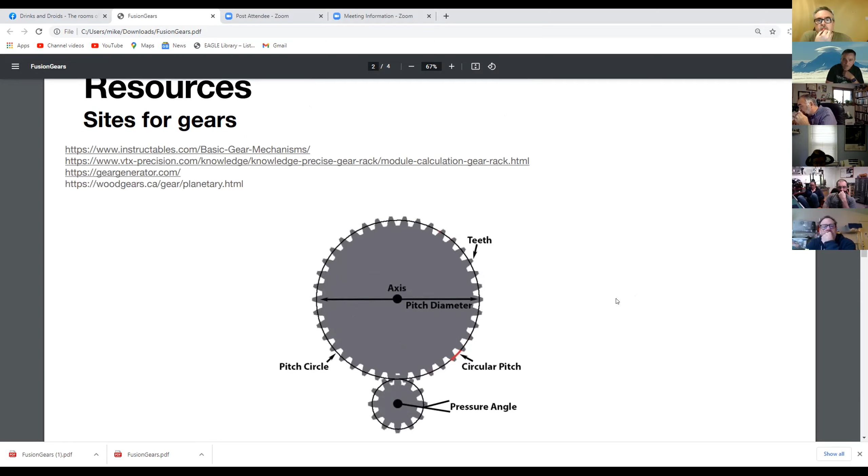Right, so in the perfect world we take half of the pitch circle of each one, the radius circle, and like today's example that number is 58 millimeters, but you probably want it 58.5 or 58.25 millimeters. Otherwise, just due to the imperfections of reality, it's going to be too tight and bind.

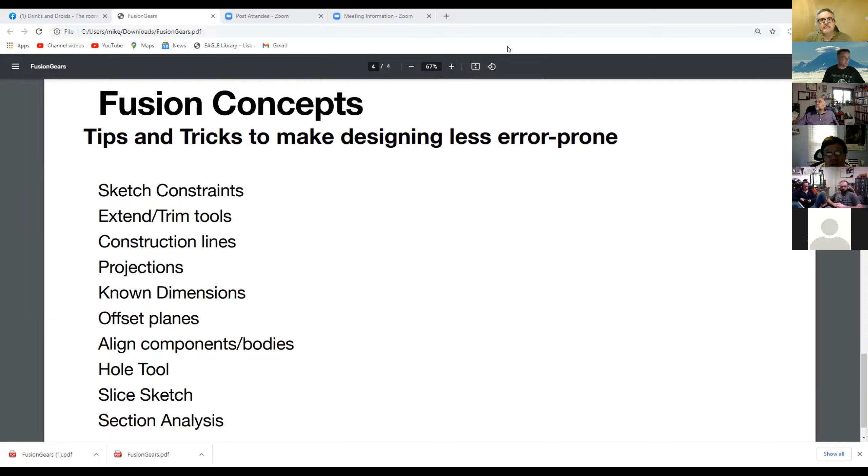So those are my buzzwords to listen for as we go into the Fusion stuff. And that's the end of my prepared remarks.

Brilliant, thanks Tim. I'm interested to watch this because I do direct modeling—I tend to use sketches only to create solid objects, and then I cut solid objects up.

So I use it in a very different way than you do. But I think it's worth seeing every facet, because as you get more comfortable with Fusion, you tend to develop your own persona of how you actually use it, because you can use Fusion in lots and lots of different ways.

Cool. Yeah, I have been toying with the timeline. I did a recent project where I vowed to use the timeline the whole time, and the only way to do that is to manage it with components. And so in the same breath, I at the end of it abandoned the timeline. It just gets too complicated.

Yeah, that's good to hear. I thought you may say, 'Oh yeah, it was great, it all worked for me,' because I've tried the timeline a few times, and I've just wrestled with it and thought, no, it's more trouble than it's worth. Well, the duo model I did is 100% with a timeline, but it's also got components. The cool part is when you click on a component and edit just that component, it has its own timeline, and that really boils down the complexity.

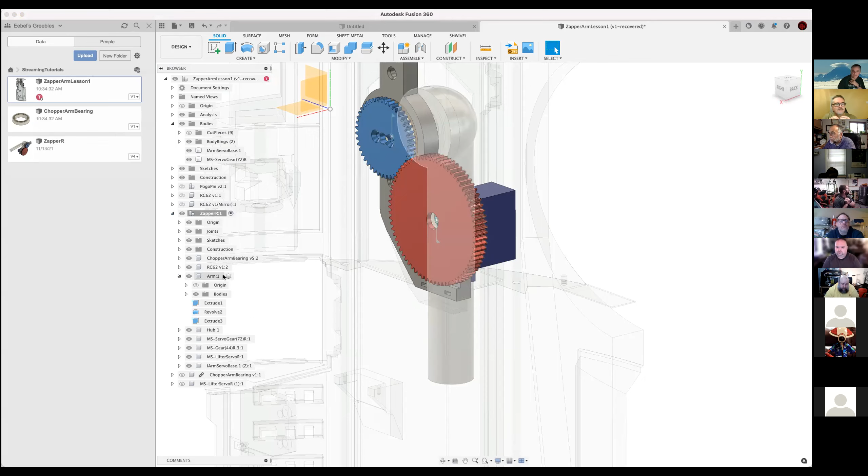Everything else in the project goes to this glassy mirror gray stuff, and then my project becomes active. And the important thing is every edit, every cut, copy, paste, sketch, plane, everything is now going into this component.

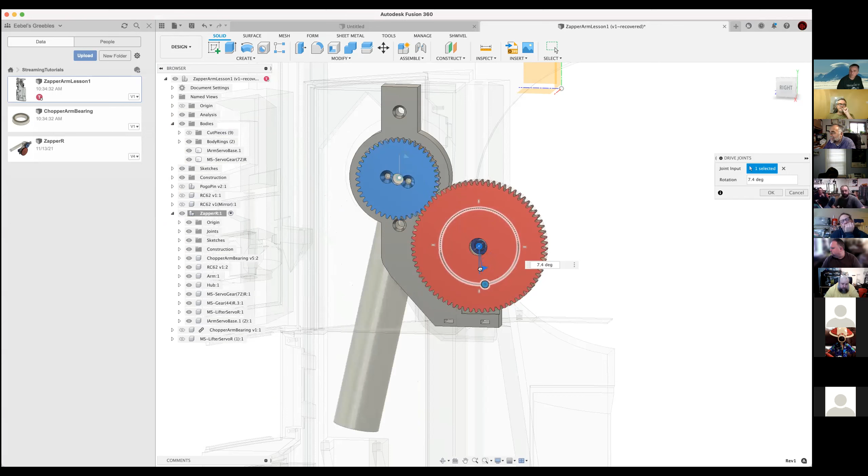You can see it's a complete set of everything a project would have inside this one component. And if you look at my component here, it's got components. The reason I do that is if I want to do any animations, they have to be components. So if I click on this and hit drive joints, you can see I've got this animation. It's not an animation, it's just a physical relationship, so I can see range of motion and conflicts it might run into.

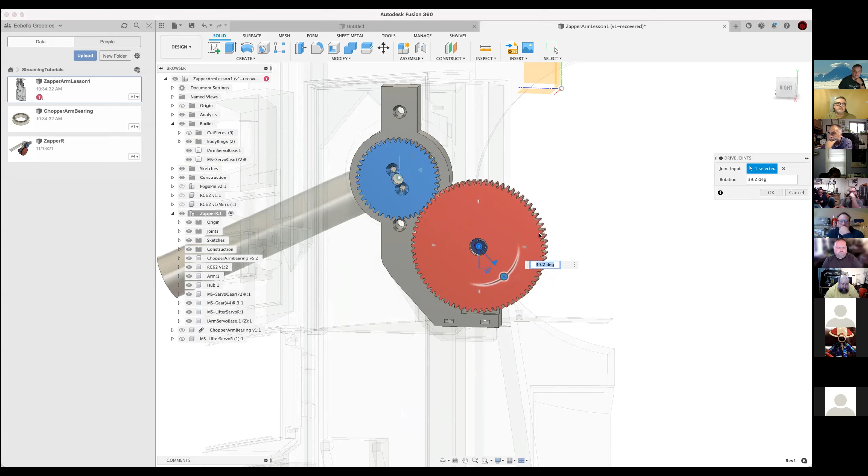Most importantly, in my gear design I wanted my servo to move less than 90 degrees and my arm to move more than 90 degrees. The easiest way to do that is to have more teeth on my drive gear than on my driven gear. So in my design, my servo moves 60 degrees and my arm will move about 95 to 100 degrees.

The reason I chose to do that is when you're tuning servos, if you're at exactly the limit of the servo, you're going to run into troubles, because that servo may or may not deliver a full 90 degrees.

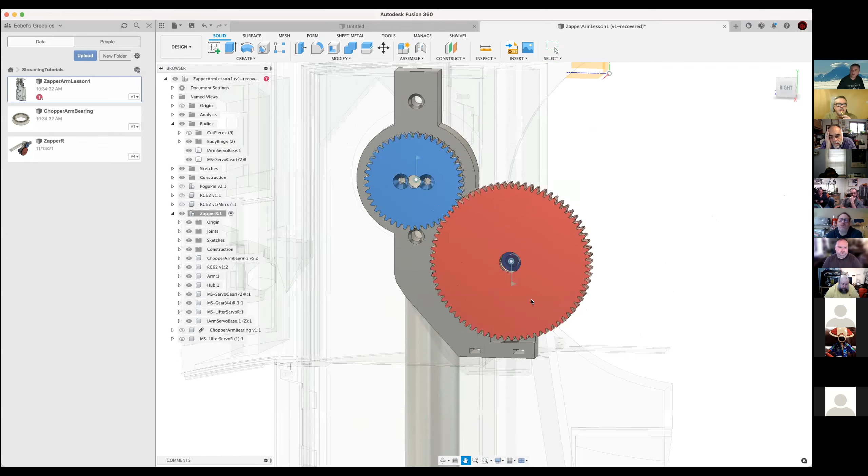Hello? I can't see anybody else's. That's okay, carry on. Okay, there's a bit of background noise.

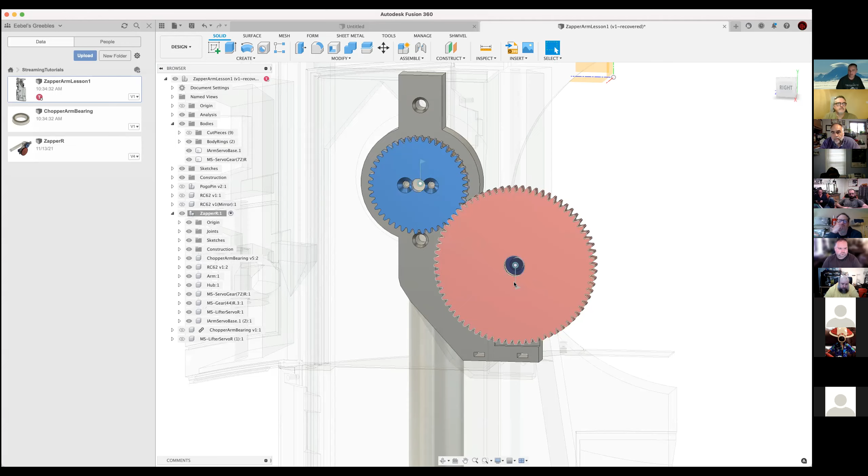If I can have my servo run less than its full capabilities, then I have an opportunity to tweak that servo when I'm installing it and programming it. So I'm not going to run against any hard limits, meaning I need it to run 92 degrees to get the motion I want. If I design it to never need the full 90 or full 180, then it's much easier to tune that servo, install it, and have it work for me in a snappy fashion.

So that's kind of a sneak peek of where I want to go with this project.

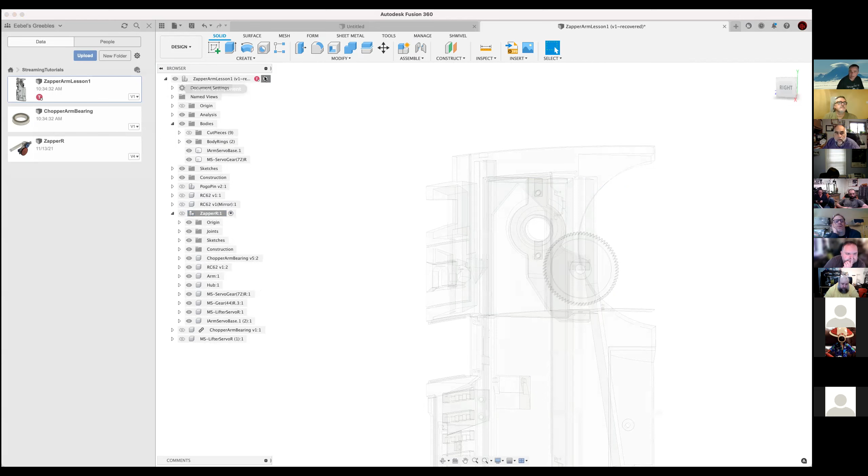Other things of note, I've got choppers. Let me activate, this is important — I'm going back to reactivate the main project. So this completed Zapper is still there, I just turned it off, but nothing's going to be changing on that component. And if you look at this component here, chopper arm bearing, see this little link, this little chain link? That means this component is immutable — it cannot be changed by me by accident because it's bound to the chopper arm bearing.

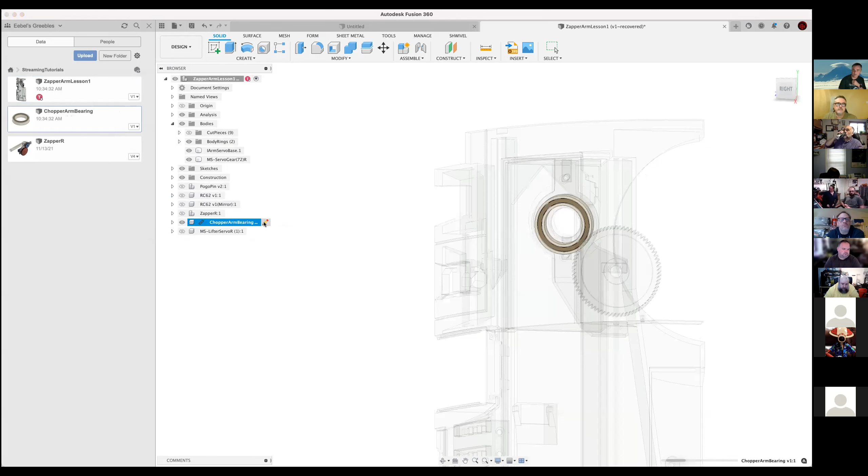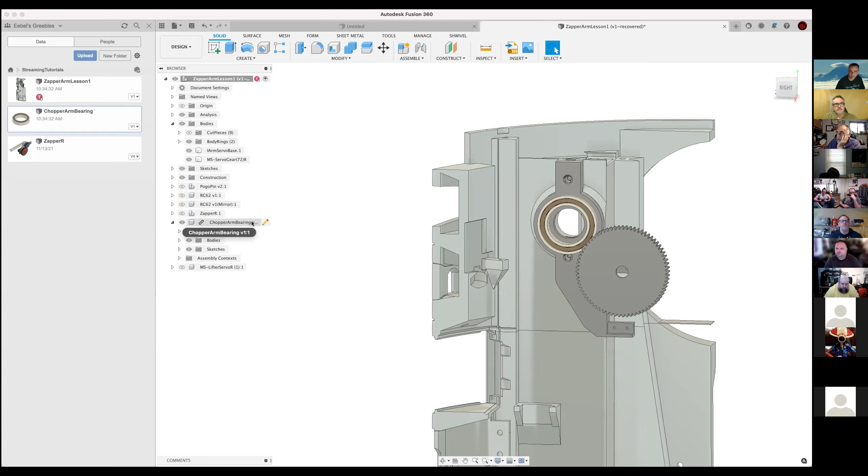That doesn't mean I can't change it. I can change it one of two ways: one, I can open the chopper arm bearing as a separate project, or two, if I go to this little pencil, I can edit it in place, sort of like editing in a sketch. I can do whatever changes I need, but I have to come here to this check mark and end that. That's an important safety tip — if you don't do that, you're going to get confused as to why your edits aren't working, why did Fusion crash on me? Well, it didn't, you just have to play along with its rules.

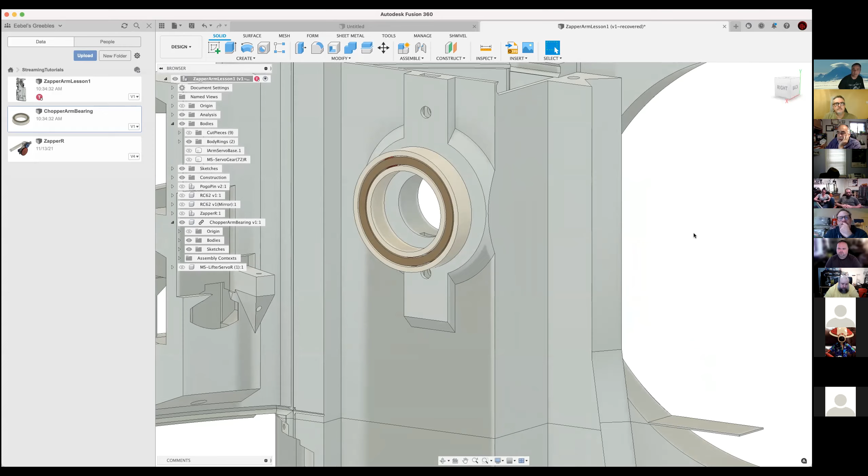So this chopper arm bearing is something I thought would be neat to integrate into this servo lifter, because that's going to give it more stability, so it's not going to rock back and forth, and it's going to be less load on the servo because it's going to have a nice bearing tracking a path.

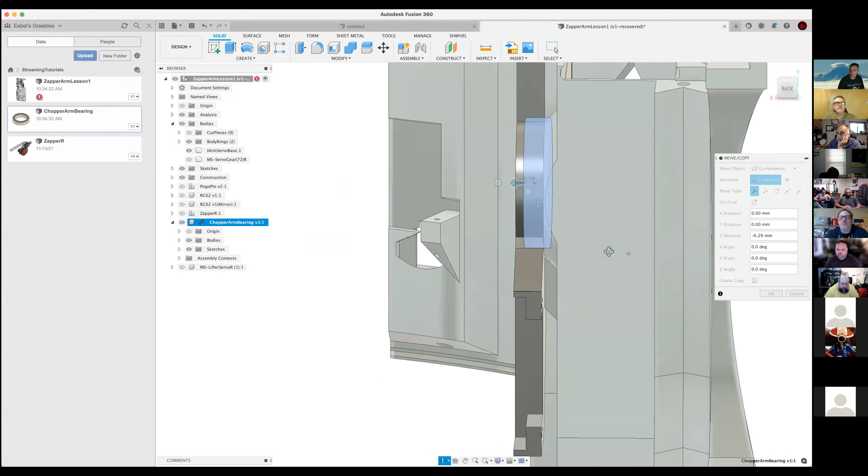The biggest reason I thought it'd be cool is, if I go move here — let me just play here for a sec, not that, I want components, and I'm going to pick chopper arm — if you look at it, it fits inside of the existing mount. So I thought, oh, it's purpose built to pop right in there. As a happy accident, the chopper arm bearing, I can reuse as a basis for this upgraded arm lifter. So I just hit escape.

We'll get back to that as the lesson progresses.

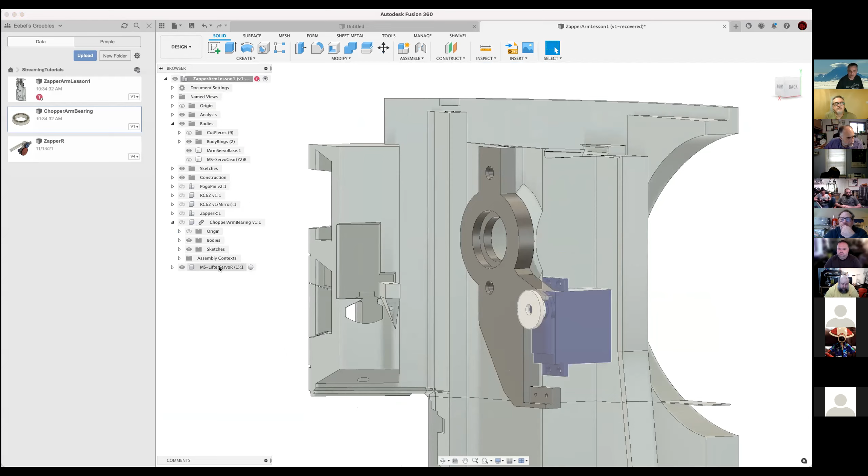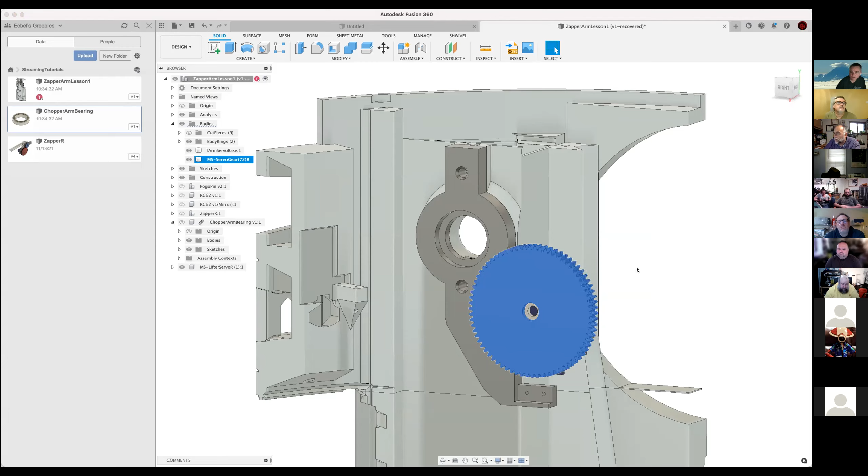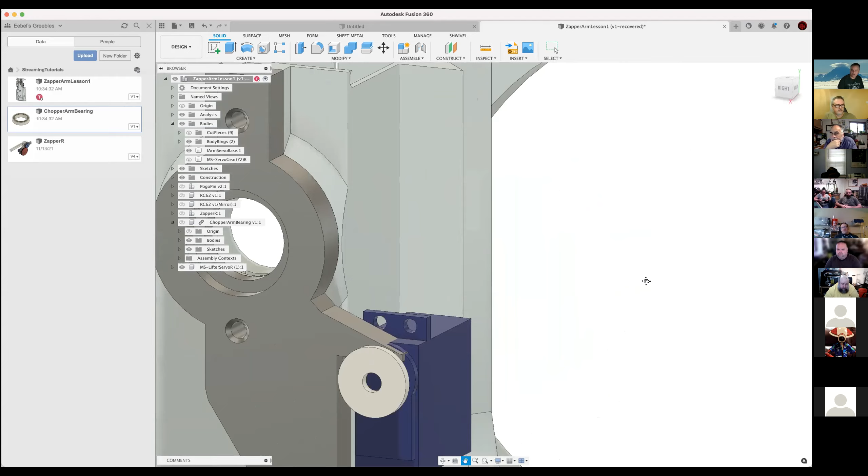So what I did was cut and pasted, or built a new component for this servo lifter, from Chopper's design. The reason I did that is, again, it's a shortcut — Chopper used this exact same 72 and 44 teethed gear, and since I'd already gone through the pain and trouble of working out that geometry and test printing, and finding that servos would work, I just started that as a baseline for doing the model on the Mark III. So the reason it's sitting here in midair, kind of smashed into the lifter, is because that's exactly where it needs to be to make my gear geometry work with the rest of the model.

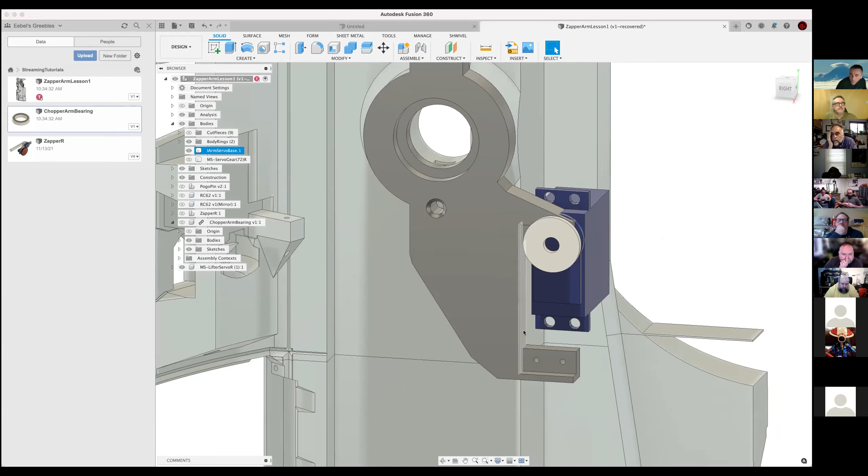So basically, I'm using shortcuts of stuff I know works, and I'll bring it into a project, often as a component. When I'm working on that component, I tend to activate it to make sure all the edits fall inside it, particularly if I'm doing motion studies. It's very complicated — if you're not careful, you'll end up with some joints in the wrong component, and things can get confusing.

So probably step one is to split up this joint. Is everybody familiar with the split body command? All right, so I'm just going to pick the face and hit split. I always keep track of what extra pieces show up when I split stuff — if I get things I'm not expecting, I know I've made a mistake. This makes sense: I've got these two extra pieces, and that was my intent, to get rid of those.

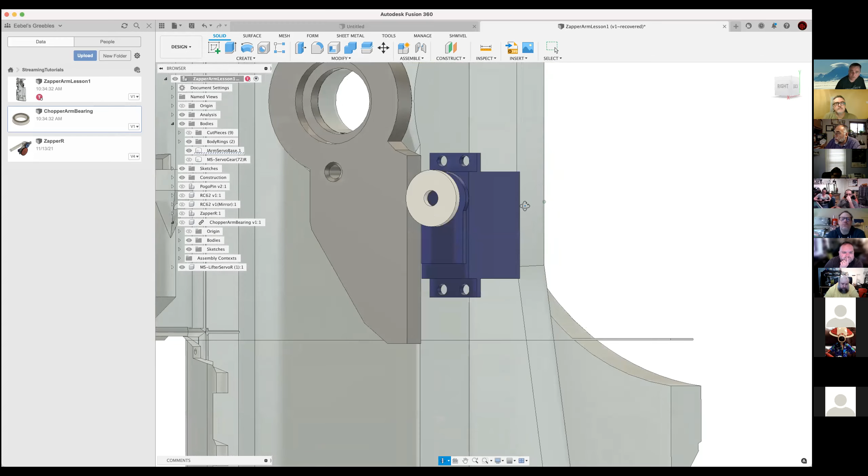So at this point, I'm just going to go hog wild and delete them. I don't need them, I'm going to build new ones. So to build a new mount, the first thing I probably want to do is create a sketch, and I'm going to do it this way.

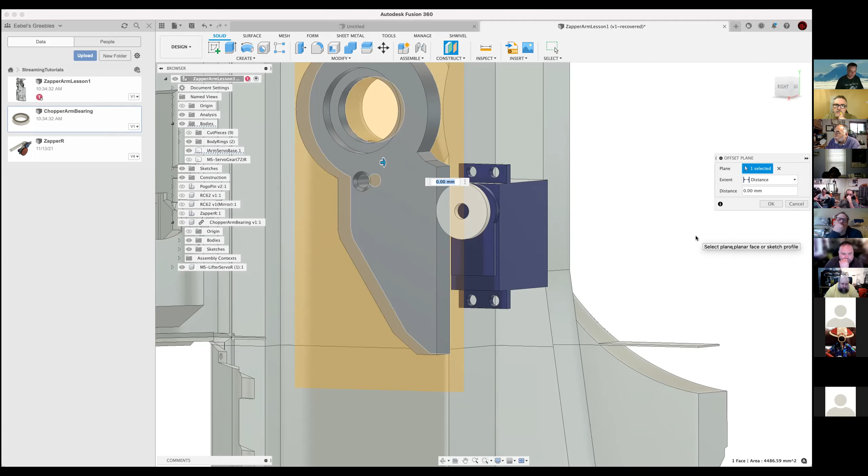I'm going to do an offset plane, and create it on the back of this mount, because thinking about printability, I want this to lay flat on the bed, and the back of it's going to be on the bed in my design. If I do anything that changes the flatness of that, I'll try to avoid it. So here's my offset plane, and I'm going to hit OK.

Here's a fun thing I learned recently — you can stretch this plane around by just floating your cursor, see how the line turns green? It's not necessary, the plane's a plane, it goes forever, but it's kind of nice not to have a big chunk of messiness all over your screen because it tends to obscure your vision.

So Tim, why do you draw on an offset at 0 as opposed to actually drawing on the plate?

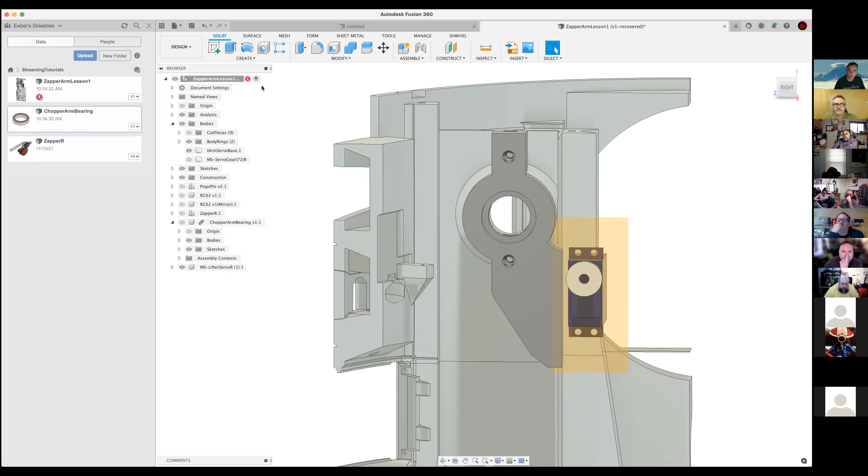Well, the reason I don't always do that — if I just grab that and drew a sketch, it's going to import all this extra geometry that I'm frankly not interested in, and it can get me confused with extra lines and dots. It's just more clutter.

So I'm going to create a sketch on this brand new plane. I hit it when it does that. The only geometry I'm interested in from that whole piece is this, so I'm going to hit that, project with the P key, and hit OK. Now this is the only bit of geometry from the previous model I have to be concerned with.

This is really an important point — when you draw on the actual face of the model, it knows where all the edges and circles are, and it will attempt to snap to those. When you draw what you think is a continuous perimeter, it can sometimes segment that through the existing design. So by doing the offset plane at 0, it's effectively like starting a new sketch in a notepad, isn't it? It is.

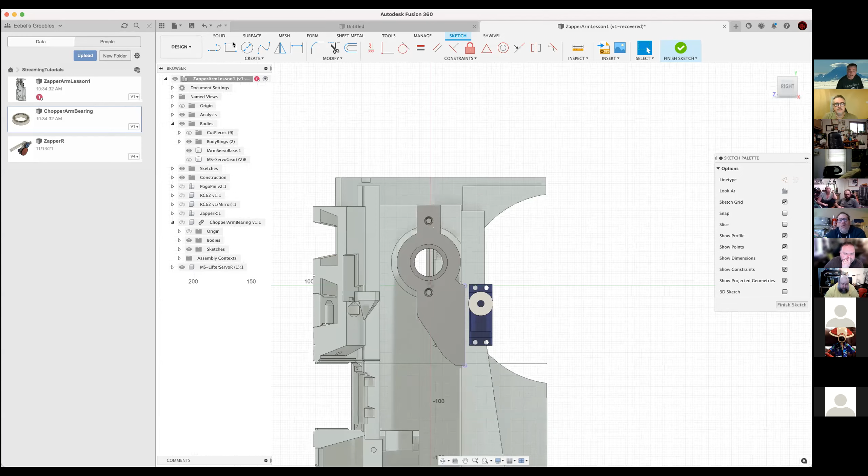And the feature where it automatically projects the geometry onto your sketch — that's an option. I've been afraid to turn it off because it's so entirely useful most of the time. But sometimes, particularly when modding, you don't want that extra distraction geometry or confusion it can generate. So the first thing I'm probably going to do is just randomly change the shape of this. And I already don't like how this is working.

So grabbing this 2-edge triangle thing, you can see here's the error already - this is not lined up with that, and I don't like that. So I'm going to undo that, and I'm just going to take out my line tool and be a little bit more precise with it.

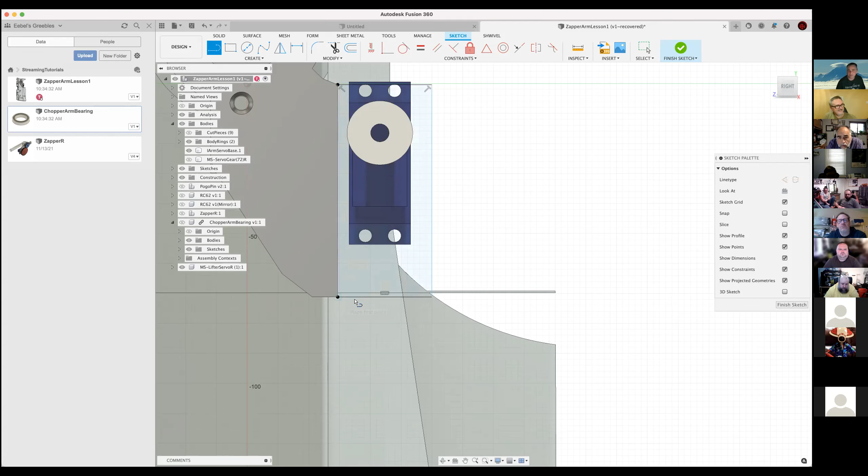Everyone knows how you can constrain by selecting something. Right now look, I got 90.6 - it's not really 90. I always make sure I'm getting 90 degrees out of things, or known angles out of things. And here's one thing I will also do.

Now that I've got that, I'm going to select this line and hit X, and you notice how it turns to a dotted line. So now that's just a construction line - we talked about that in the preamble - and I'm just going to close this off and put my own line in.

So although I started the other thing as a projection, I've kind of divorced myself of that other geometry. So if I need to change something, I'm not entirely locked in there forever - it's just a little bit less confusing to me when I divorce the geometry from those projected things, because that can really get you into a lot of frustration. You're like, why can't I change this? Why is this not working?

It's because of these constraints. So in this picture, you can see this line is black, that line is black, this line is blue. That means this is not constrained, which in this model is probably fine, but I'll just eyeball it and put it there for now. And you can see this line is black - that's constrained. So I've got one unconstrained line.

If I were to, I don't know, put a dimension here with the D key, that's over-constraining it. Maybe here - does that not go black? The constraints can be a little bit of an art form.

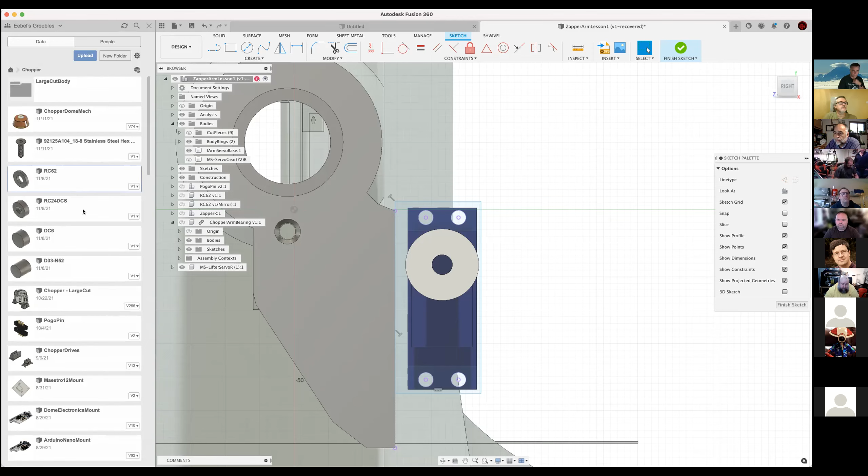Another place to get things - and my screen's still sharing, so let's go back here to, for example, Chopper. If you look at Chopper, a lot of websites will have step files that you can import directly. So this RC62 - these are all magnets that I downloaded, the step models from KJ Magnetics. This pogo pin I modeled, but if you go to GrabCAD, they have things like this - or maybe I got this from Pololu. This will take a second to open, but they had a model of their board in CAD.

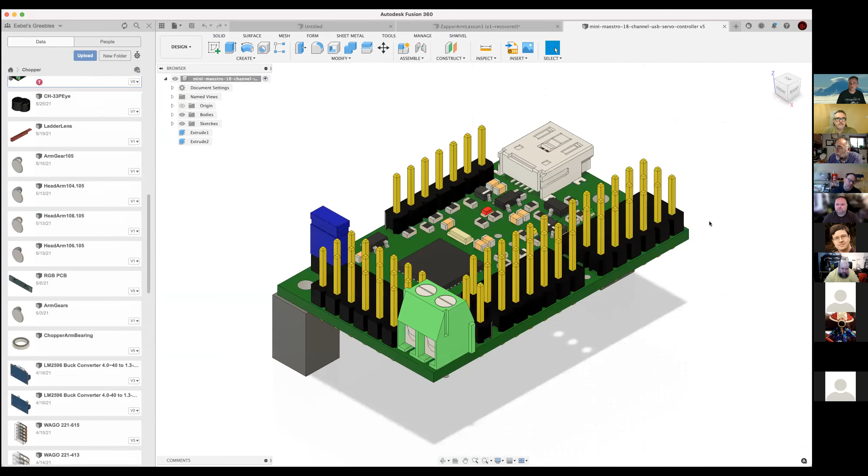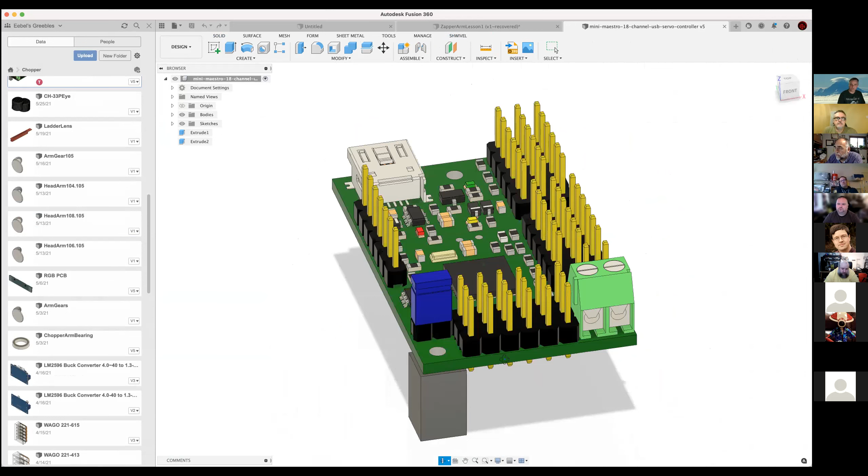So grabcad.com is a place I'll go to for things like buck converters or whatnot. In this model, you can see what I did. This is a Pololu product, but I added the geometry for the little mounting pads.

I added that to my version of this component. For example, I'm going to close this sketch on this sidebar. If I wanted to import that in here, I can just right-click, insert into current design, and after a few seconds of thinking, it'll let me place it into this model.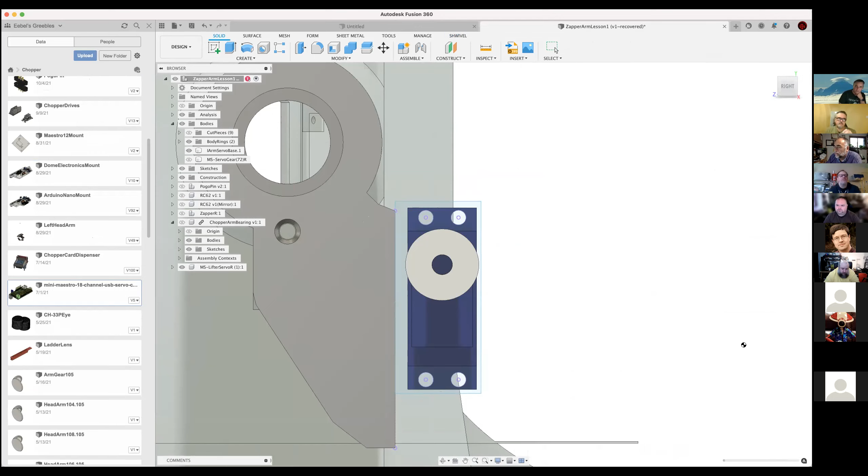You can see my little progress bar. It's going to take a second to download off the internet. Here it comes. All right, you can see the important things. I got this Mini Maestro 18 channel.

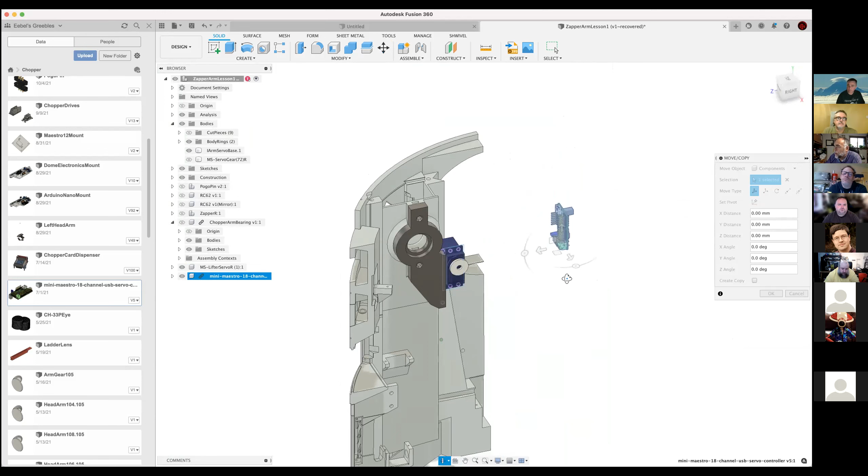I've got it chained, meaning this model is not editable without a couple of hoops to step through. Then I can place it anywhere, and usually I just do a raw place. I'm careful to always spin things 90 degrees so I don't end up with some kind of weird twist to the model.

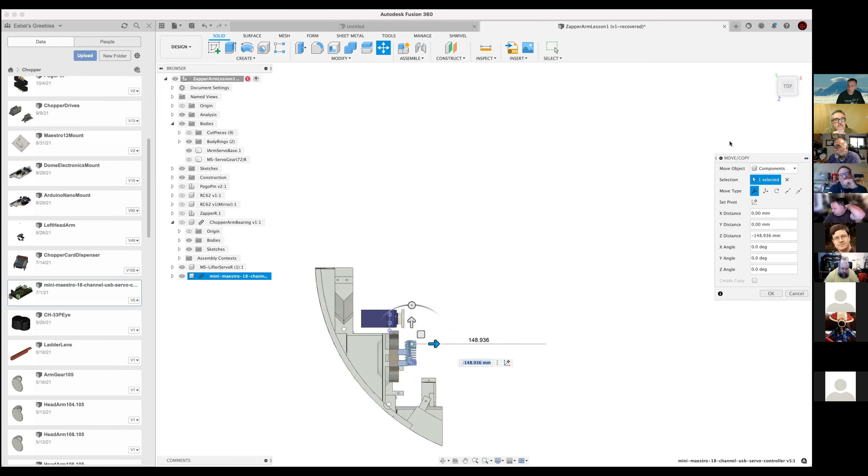But if I wanted to integrate this Maestro onto this mount for some reason, you can see there we have it. And then I could combine pieces, and I think that answers the question.

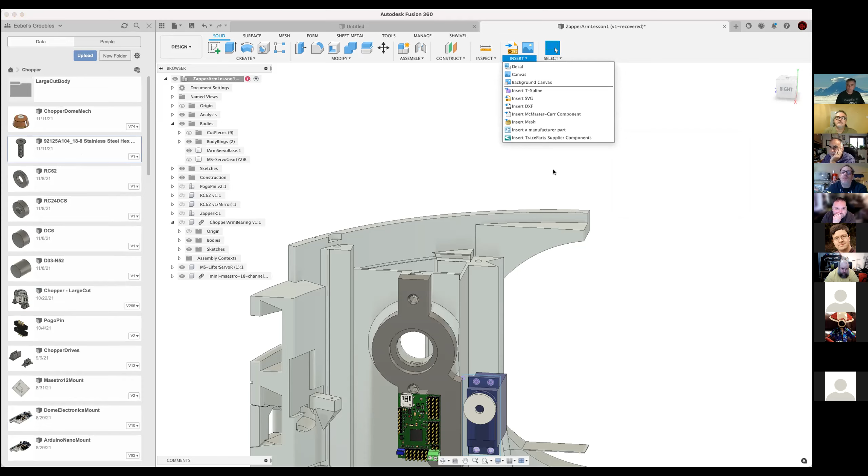Another good source: if you go up to the top, you go to Insert, and you can insert McMaster-Carr parts directly. They used to be McMaster-Carr, and just recently it's now TraceParts, which I clicked on the other day and was a little upset because you might have to make an account. I'm sure you don't have to spend any money, but like this bolt here, I actually went to the website, exported it, and then imported it because it was no longer an easy insert from McMaster-Carr.

Oh, there it is, never mind, take all that back, I just missed it. It used to be at the bottom, and now it's not. Yes, I use this a lot—you get all your hardware and such, it's good for inserting screws and such.

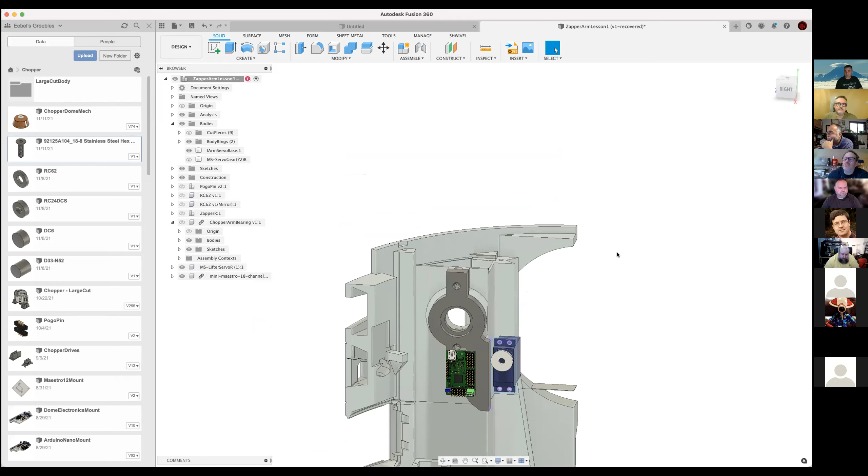Exactly, and I don't normally model screws or put screws in unless I'm trying to show an explicit assembly, like in the instructions. Or theoretically you could do a hardware bill of materials if you modeled all your screws and put them in, but it adds a lot of extra computational requirements on your models. So the less things in your model, the better in general.

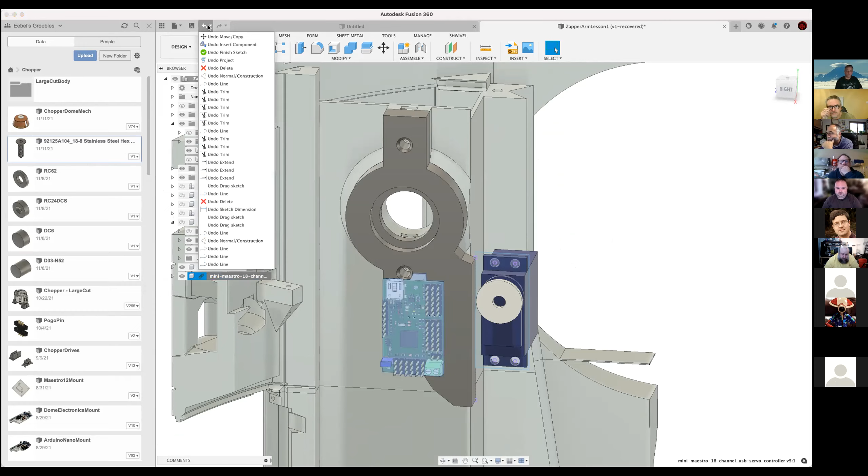I'm going to undo all the way back, and we'll go back to where we were, because I don't want that extra overhead of that Maestro in our model.

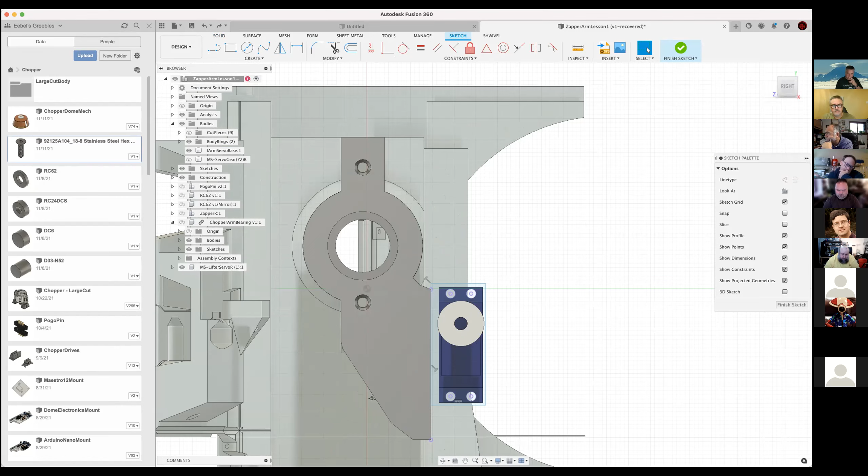One more comment before you continue: you were mentioning about reducing your throw on your servo. Yes, just one comment on that is you're also reducing the torque and the resolution of your servo when you do that. Well indeed, it's a trade-off, as with anything—torque versus speed, one of those trade-offs.

But back to the design philosophy, right now I'm not asking a heck of a lot from this servo with the weight of that tool. It's not a metal tool, it's a few grams, a few ounces of weight. The biggest drawback on that tool is it's long, so it itself has a lot of torque opposing what I'm doing with the servo. But this servo can handle it, taken to its nth degree.

You're correct, but back in the design philosophy, I'm not asking too much, but I want to make sure it's easy to program and easy to set up. The frustration I found is when mounting a servo arm onto a servo, if I click it this way, it's too much; one tooth to the left, there's only so many splines on that servo, and that's too little. I hate being in between clicks.

If I can give myself the ability to use either one of those and get out of that problem by using my servo range slider in the Maestro control panel, it's a much easier resolution than being right at the limits of the servo. For sure—yeah, you don't want to be right at the limits.

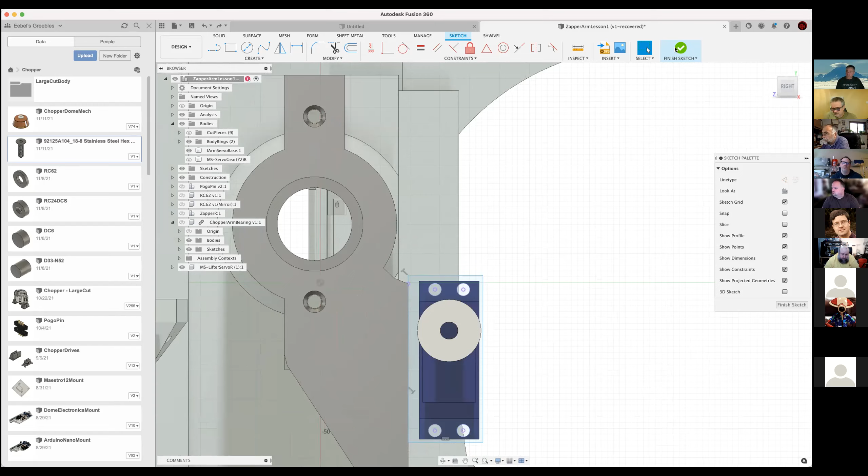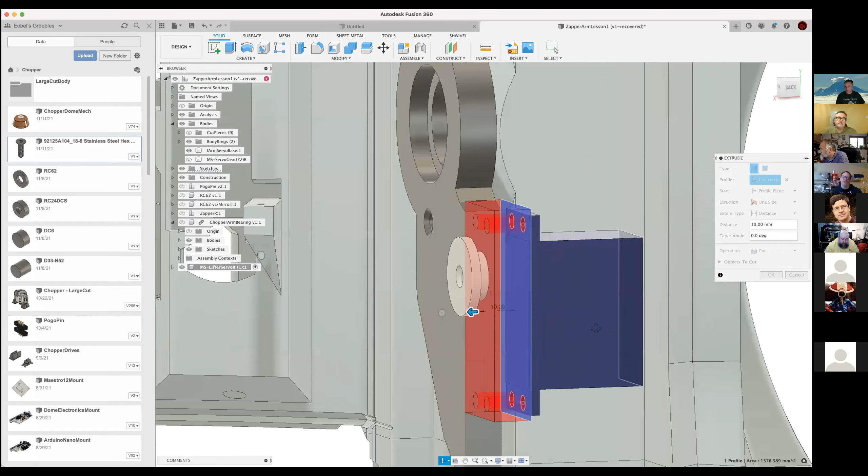All right, so what I've done is I've extracted the relevant geometry of my servo master, and I've built a little thing that I can extrude as a mounting point for it. So I'm going to finish sketch, let it think a little bit, and then since I don't have any of that extra spare geometry, I'm just going to hit that and hit the E key for extrude. I'm just going to make it right now as thick as the other, but at the end that probably won't last.

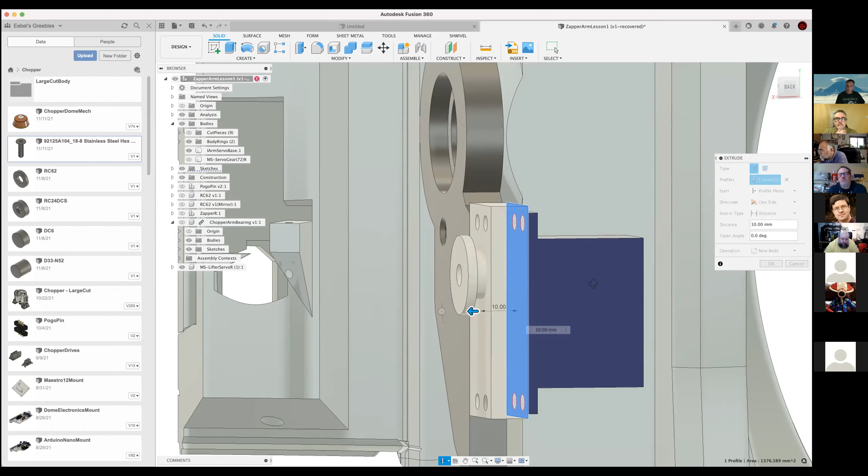And here's the problem - look, we got objects to cut, and you can see my servo disc, and I don't want to cut anything, I just want to extrude. In fact, more often than not, I'll just go new body. That way I know I'm not going to cut anything, and I'm not going to mistakenly take a chunk out of something or merge it to something I didn't intend to.

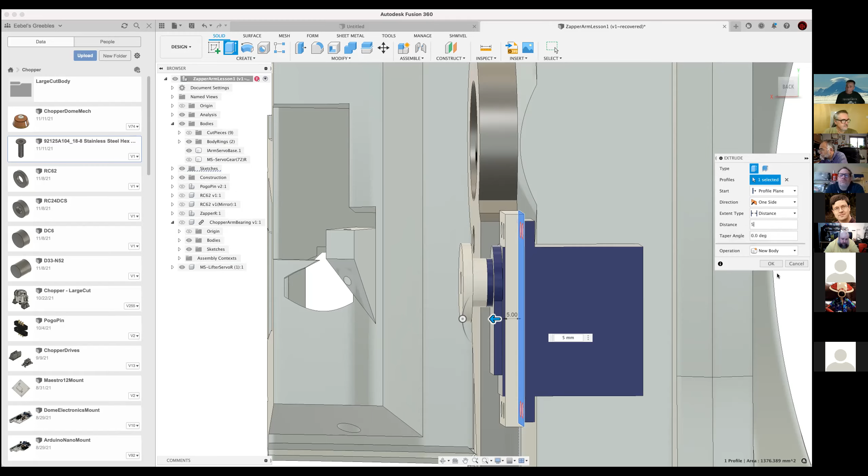Right now, I'll tell you what, that's too thick for my liking. I'm going to stop it here. Does everybody know how you can click on a face and it's going to automatically go to that distance? It comes out to 5.615 - I don't like that. I'm just going to make it 5, because I like rational integers, reasonable numbers if I can. So I'll just go with that, 5.

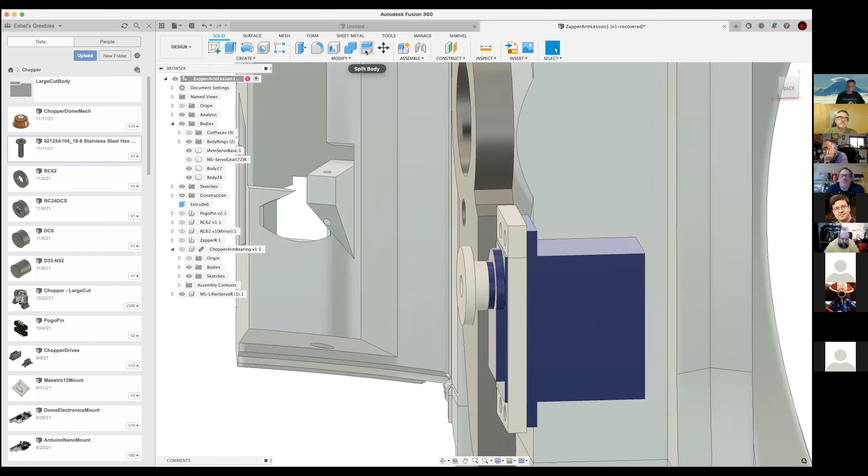Now you can see the problem is I don't have a cutout for the servo to fit in there. There's a number of ways of handling it - I'll just go short and sweet, I'm going to do the split body. In this case it picked that - I want to pick this body and that face, split. I'll do the same thing again, split body, this body and this face. Oops, this body and that face.

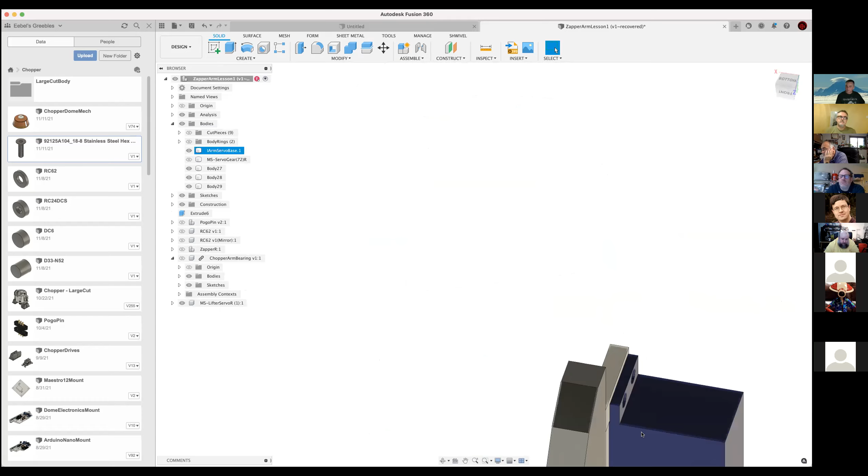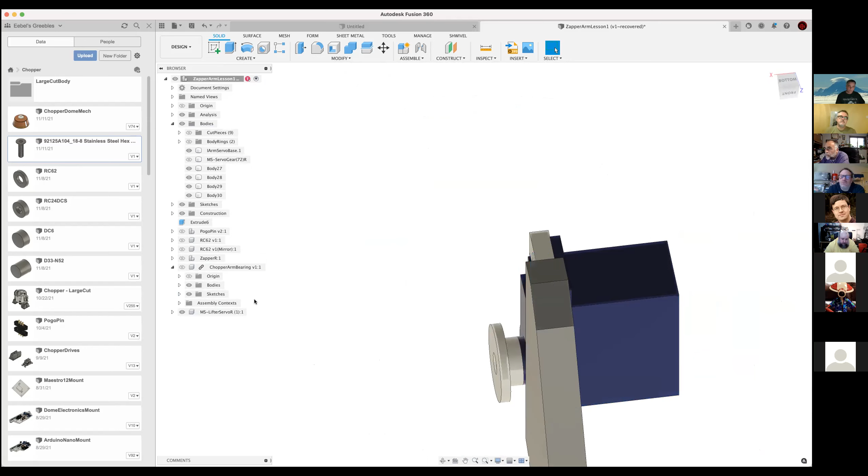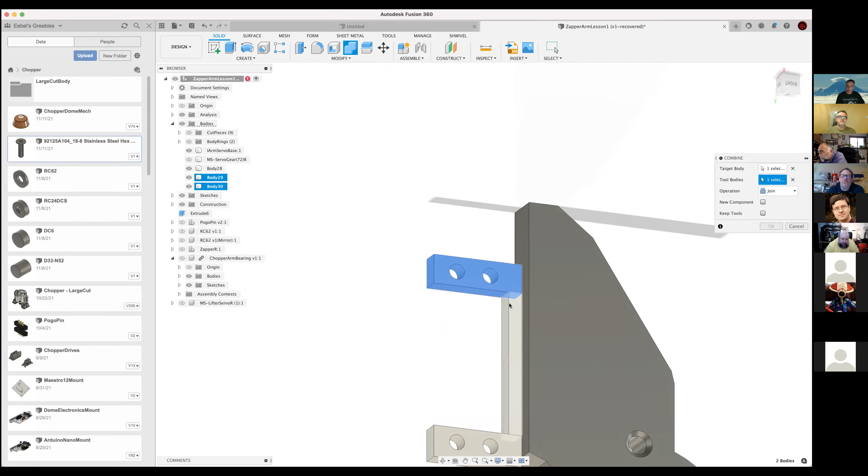Let me turn this off. There's a little bit left here - this body, this body, and this face. All right, so now I've sliced up my mount, and this one - there we go. Yeah, so this, I don't want that at all, and the rest of these, I want them to be one thing, so I'll just hit combine. If I've named something, I'm always going to pick on the name of it first so that it doesn't rename it and I end up with a bunch of unnamed bodies. So there's my servo mount.

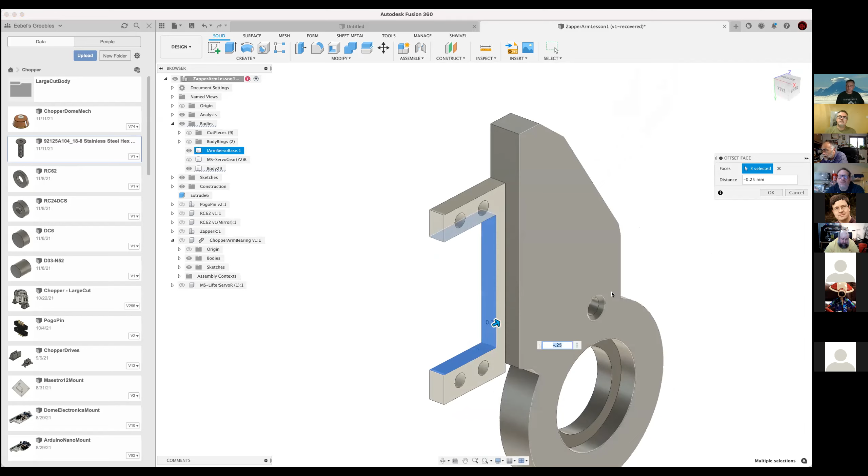What's missing is clearances. Let's say, and this is where I use the offset, minus 0.25. I hit the Alt key, or the Windows key, or the Apple key on Mac, and you can see I always kind of test it - I'm pumping that key up and down now that I've selected all those faces. That's going to give me a little bit of clearance so the servo will actually fit into the mount.

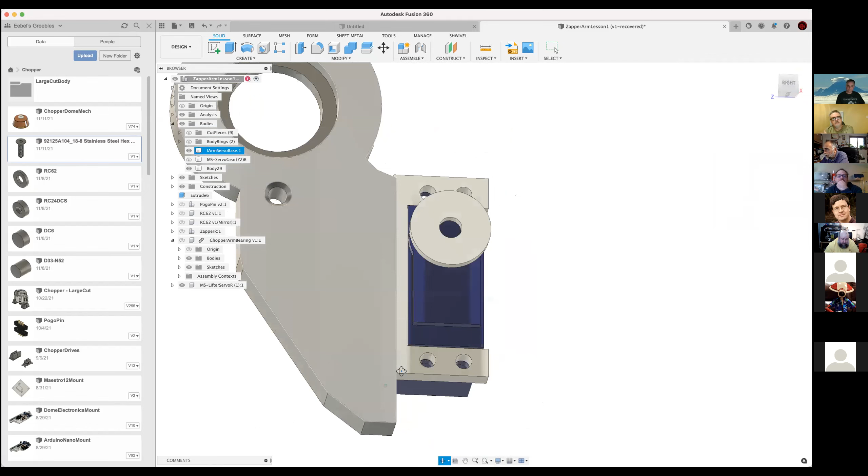So at this point, if I were to combine this with this, I'd end up with one body, but right now it doesn't look good. What doesn't look good about it is I've got this unnecessary tail here that at this point isn't really serving a purpose. So I'm going to slice that off and get rid of it. And this is not tall enough.

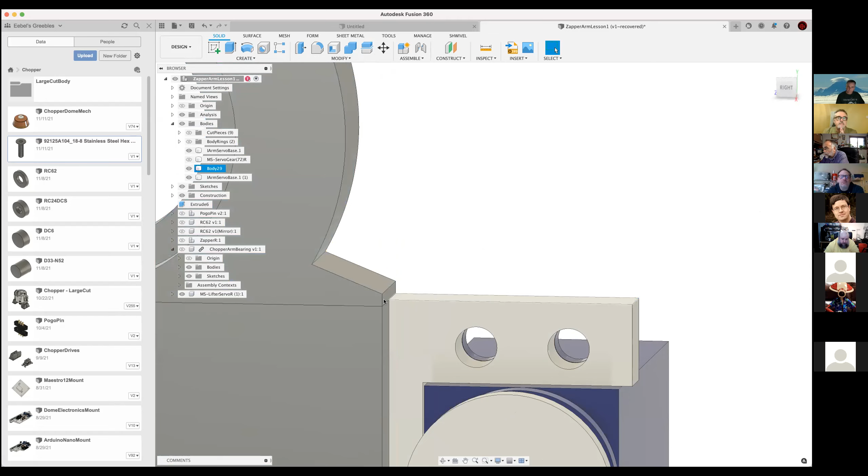So let's delete those two faces. Whoops, undo. Maybe I could delete one of them. There we go. And then let's just kind of bring this up - I'm going to bring it past it, some random spot, and then try to decide the best way of doing this. Oh, I don't know, I'll probably end up just slicing it again.

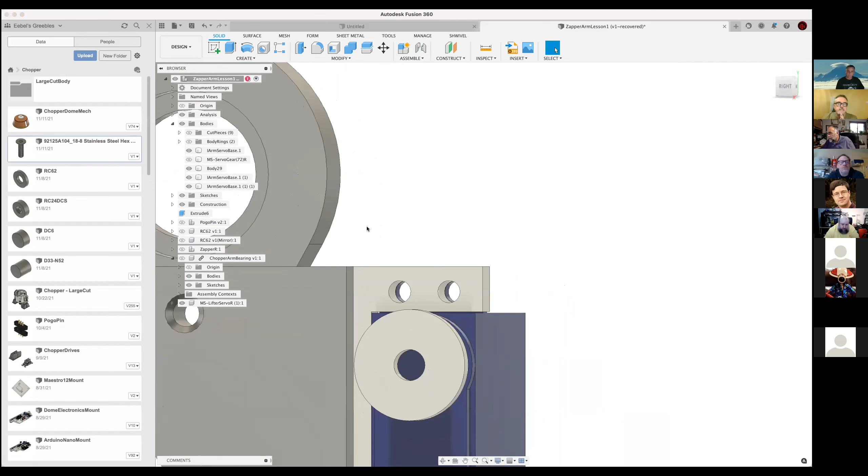And split body. If you did a Q move face, you could snap it to the corner. Wanted to do that. Yeah, I think I'm gonna just go there and redo that chamfer. And this is, you know, caveman kind of big

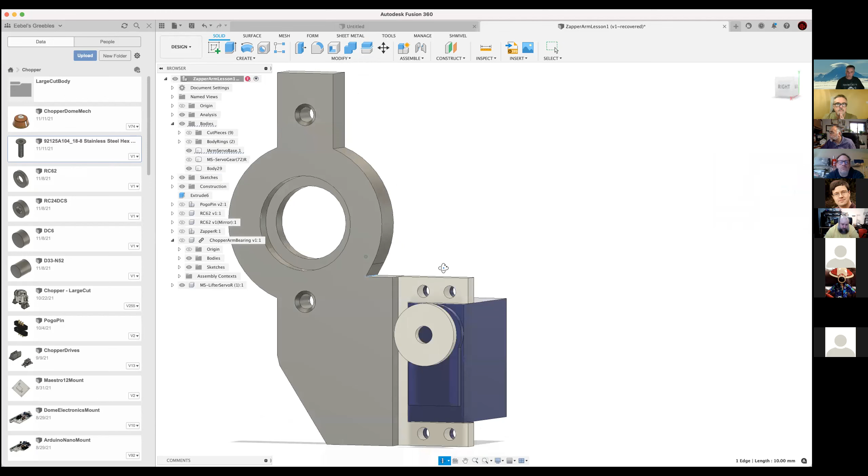Bold slices, just for expediency. So my original servo arm base is here now, and I'm going to use that as my basis. So combine this, this, and this, join, and put it all back together. And so now theirs are nice and pretty. And if I wanted to add a little more strength in this, because this is a natural stress point right

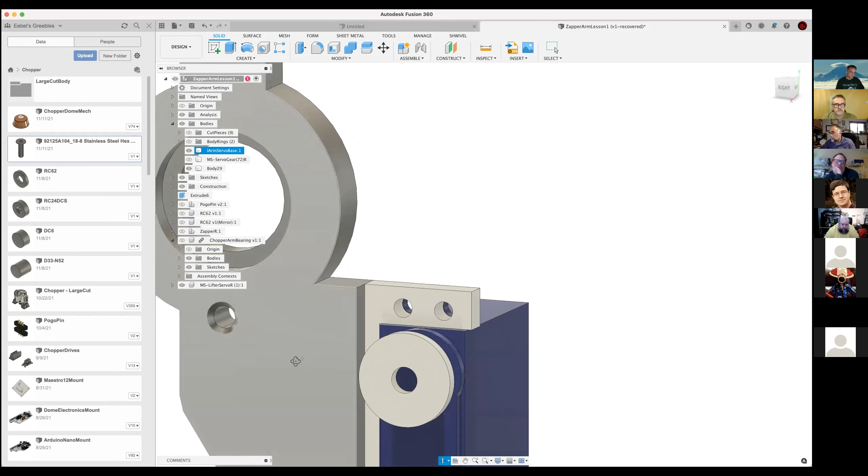Here, this sharp angle. I kind of like chamfers over fillets, just because I think they 3D print better. And you see I'm having a problem here. The problem is there's an extra face right here that's unnecessary. So there we go, I can just delete it. So anytime I see extra lines or things I don't expect that aren't adding to geometry, that's a potential error that can haunt me later.

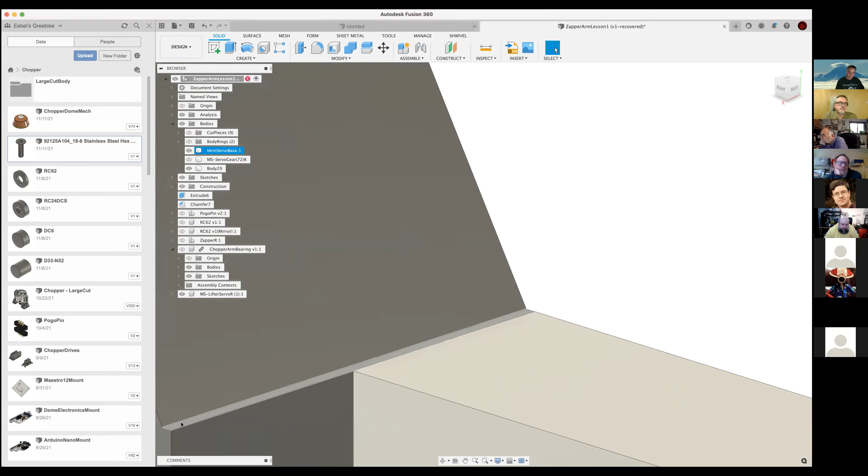So back here, go to chamfer, and something like that. And what I tend to do is just come in here and then delete this. And that screws up my thing. I'll undo that. I'll leave it like that for now.

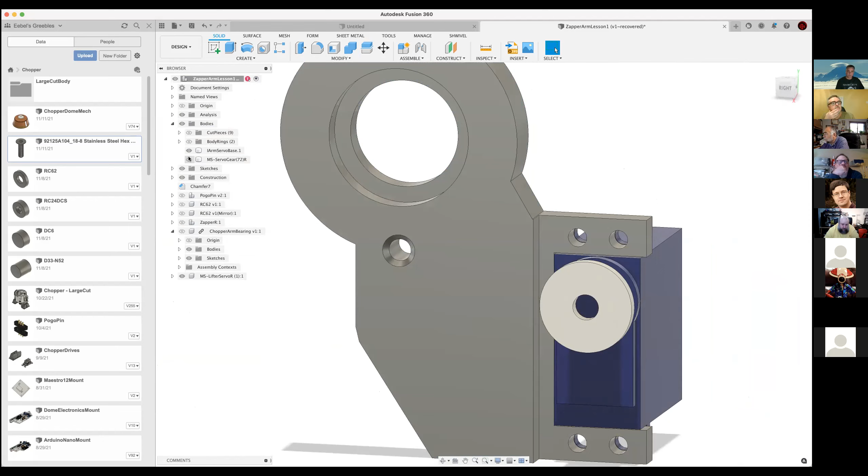We don't need to make it super pretty for the work we're doing here. So at this point, I'm probably happy with going and combining this with this. And now I have a servo mount that will work with my gear geometry.

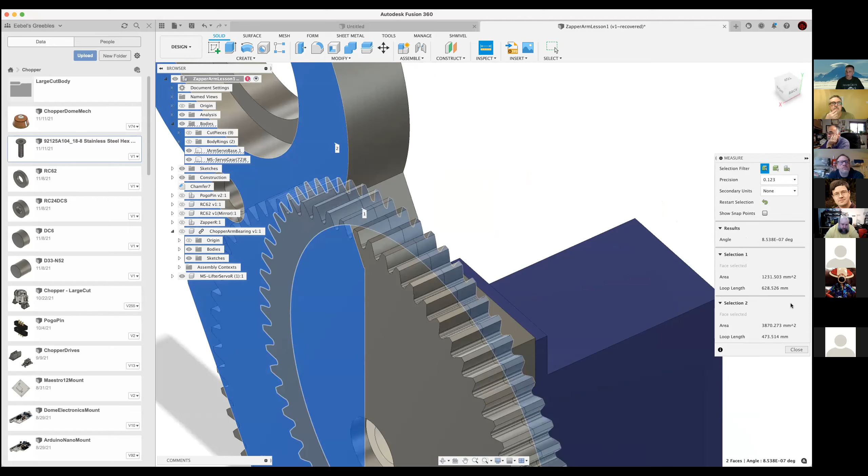Does my gear geometry work with my servo mount? So I'm looking at here, and I use the inspect tool a lot. So I hit I, hit that, and I see a bad thing just happened. I was expecting a distance and I got an angle. A really, really, really small angle, but an angle nonetheless.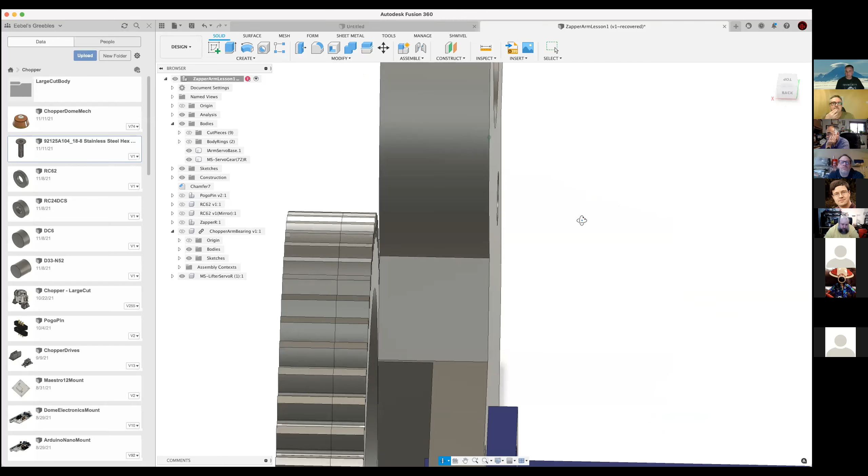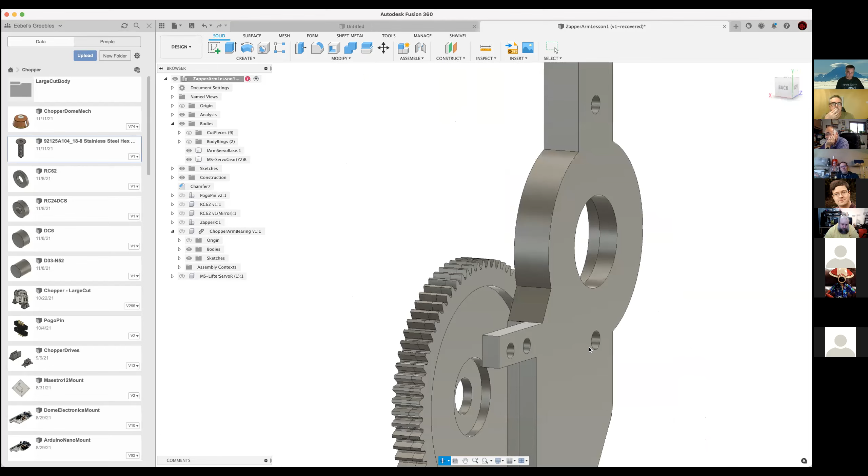So I've got some underlying geometry bad thing happening here that I don't know I want to spend the time in this Zoom to solve. But the basic thing is I have to use the align command. Let's see if I can do it real quick. So the basic problem is my gear is not lining up with my mount, and it's a super small degree error. So what I'm going to attempt to solve it is I'm going to use the align command.

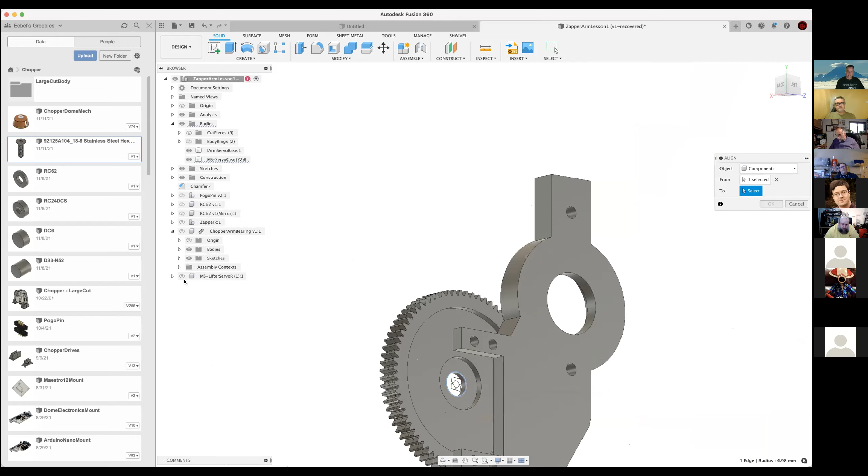So in this, I use align, and this is very critical what you pick to choose to align to what. So in this case, I'm going to align the very bottom ring of that gear - I'm going to turn that off so I can see - and turn this on with the very center of my mounting servo arm horn. And I'll turn this back on and see what happened.

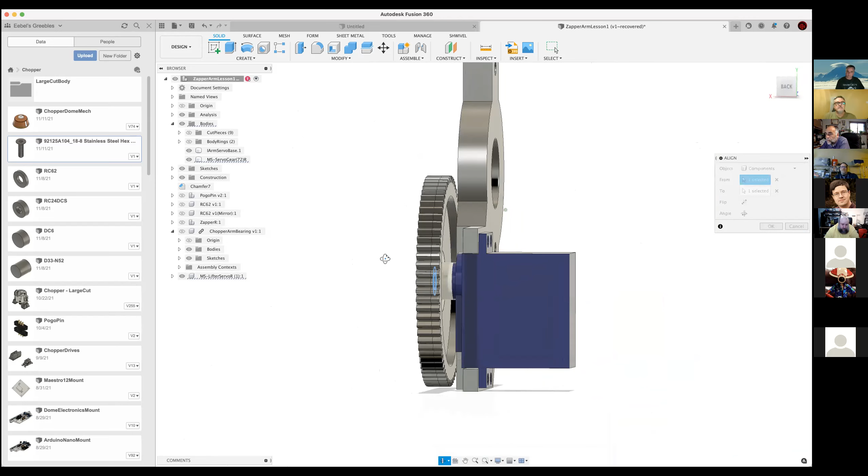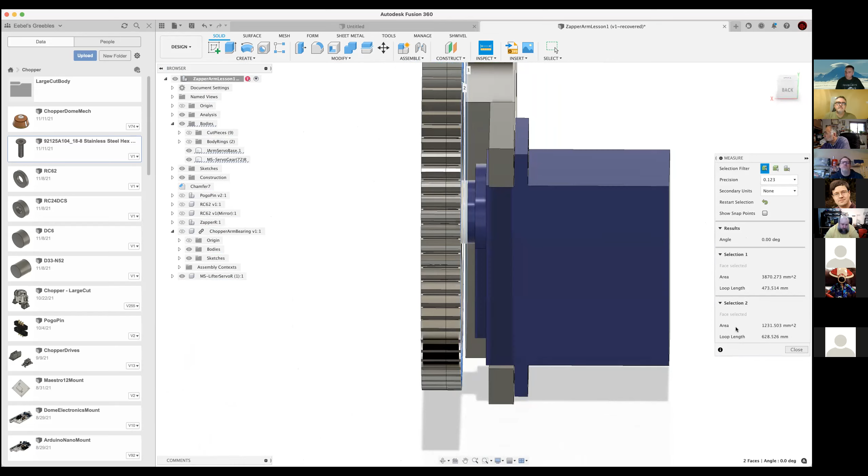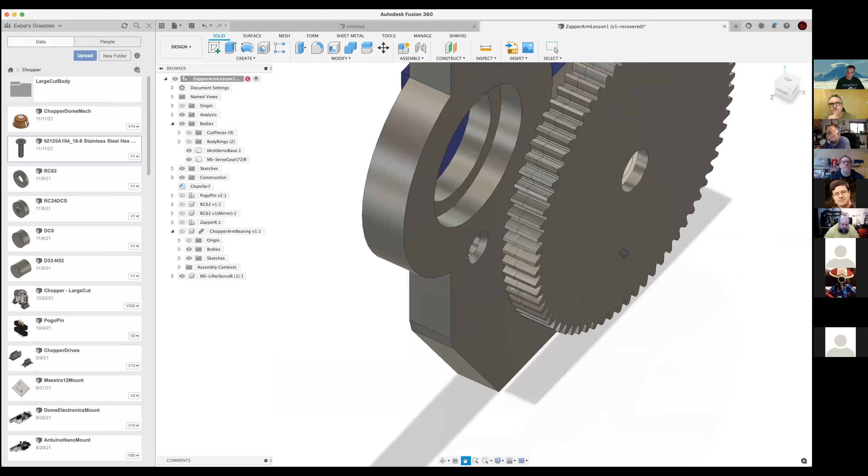It looks like that's exactly what I was expecting to happen. So we'll hit OK. Now let's see if I have solved my problem. 0 degrees, that's good. But I still don't see the distance between them. That's weird. Let me inspect that. Huh.

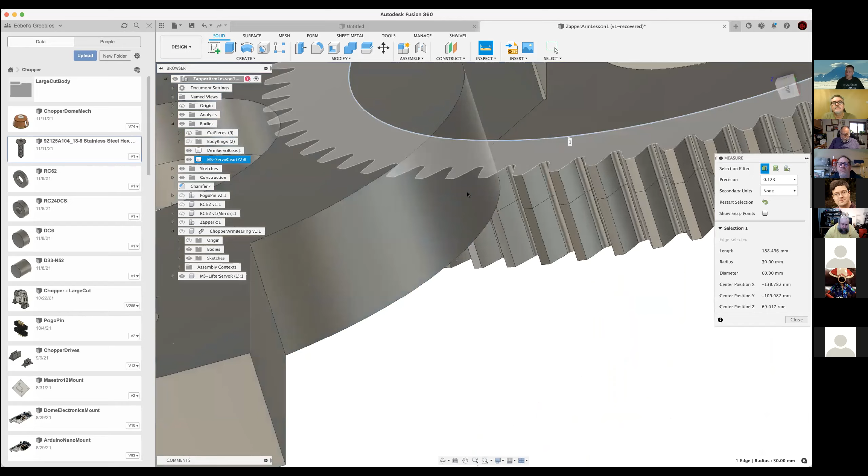Usually I'd get like a nice little number there and I don't see it. If you choose an edge or a point, I think you'll get the measurement. If you choose 2 faces, you don't. Well, all right. The problem is, well, I guess we'll try this. That one and that one. Oh, I have to inspect. There we go, 0.5 millimeter.

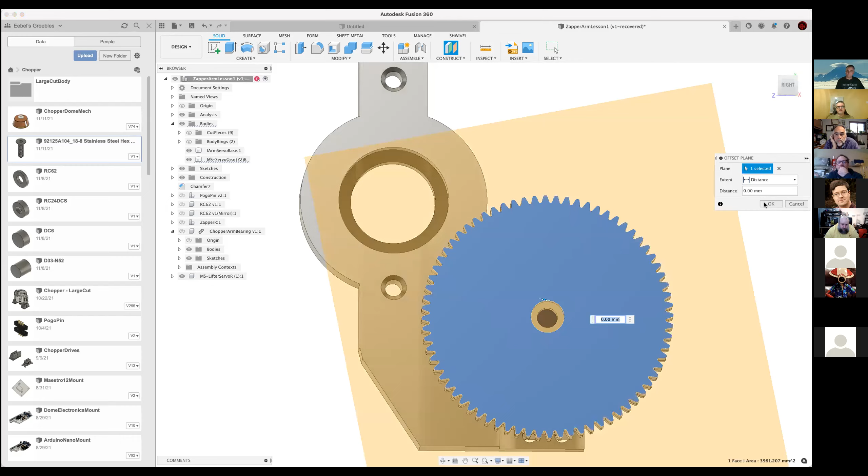I'm happy with that. Although, if I could get to a millimeter, that'd even be happier. In fact, let's just say I wanted a millimeter clearance. And here's a perfect reason to use an offset of 0. Construct offset 0. And the only thing I want out of this thing is its center.

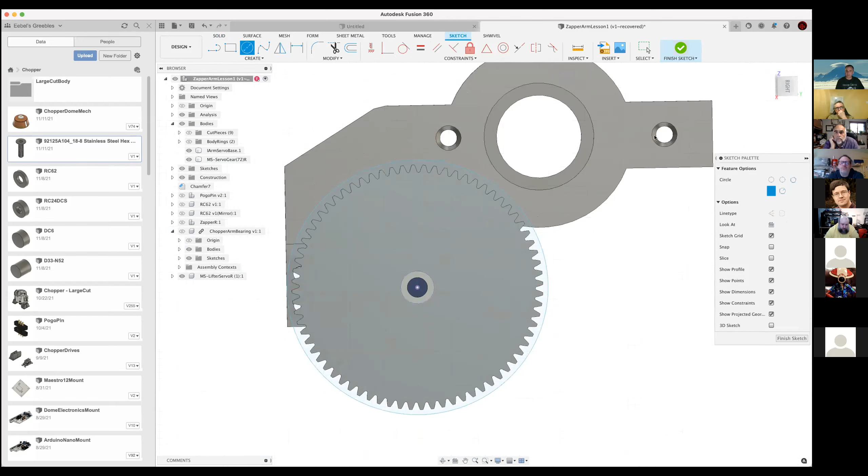Because otherwise it's going to grab all those gears and it's going to be a horrible, horrible thing to try to select that and then extrude. Like I don't want any of that gear geometry.

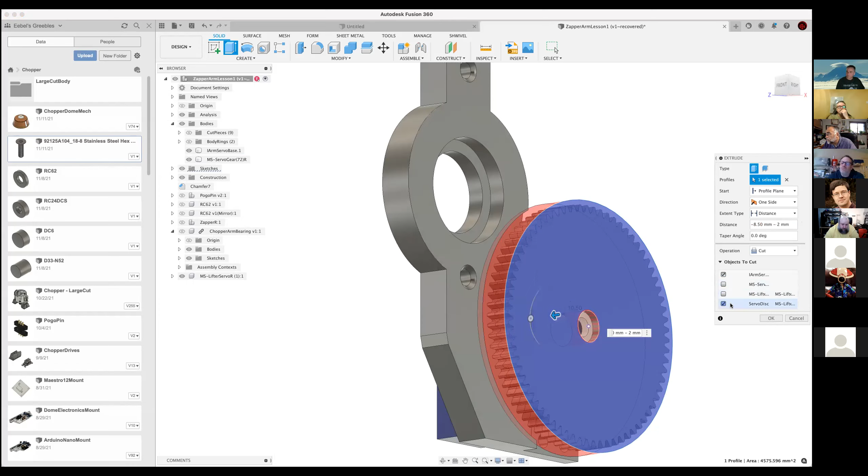So what I did here is I clicked on the face and then I'm going to add, let's say 2 millimeters of clearance to that, and then objects to cut. I'm going to make it just my servo lifter. And so now I've got a healthy amount of clearance, and that gear can wobble a little bit and not run into anything.

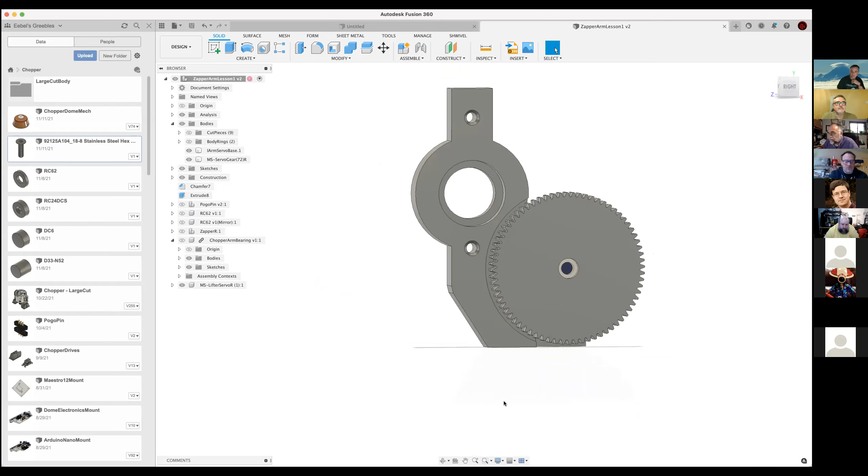So here I'm back, go ahead. So gauge that, I mean, how was that? How from everybody, did we follow that?

Yeah, got a nod from Scott. Well, I was going fast and furious, kind of, because there's a lot to talk about. I really wasn't explaining my key clicks a lot. Assuming that a lot of the stuff I was doing is fairly common, but the way I was doing it maybe or maybe not the way you do it or have done it in the past. Not you, any particular person, but the ubiquitous all y'all.

Is there anything I did that you'd like me to expand upon, or was too fast or not clear or confusing? No, it was, for me, it was clear. It was interesting watching you - like I said, you do things a little bit different.

I've not played around with the sketches. I quite like the trim, actually, which was quite cool. I live and die by these things, which is - there's no doubt you do too. Yeah, exactly, so we'll use these two.